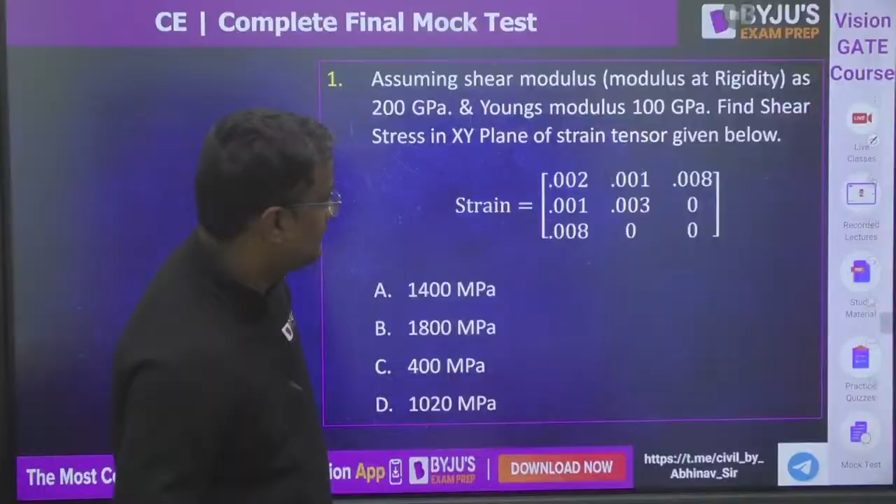So question number 1 to question number 50 I will be taking. Then question number 51 to question number 100 Richa ma'am will be taking. So I will be taking SOM, Maths, Soil, Survey, OCF, Building Materials and Highway Engineering, and the remaining subjects will be taken by Richa ma'am.

Ready guys, everyone? Please tell me. Everyone ready?

Okay, so this is the first question, guys. Please write the answers in the comment box. Come on, they are asking the shear stress value. What is the shear stress value? Tell me.

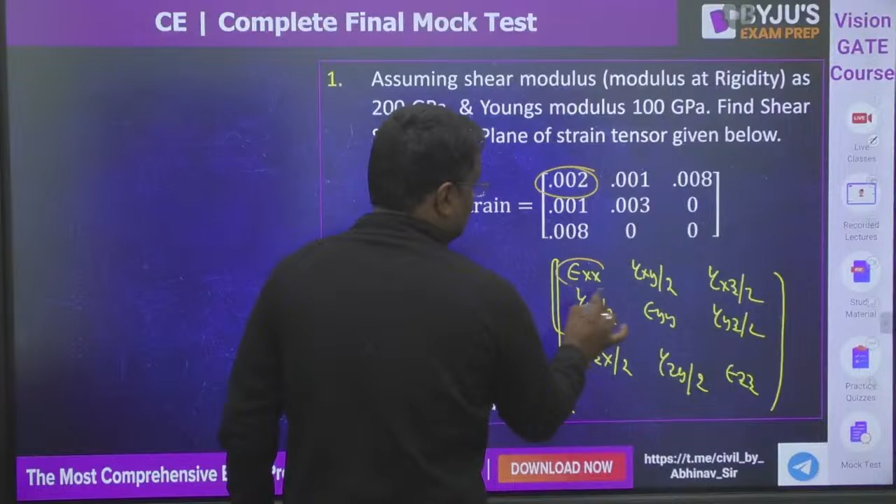Okay, see, guys, this strain is written, na? So strain matrix is epsilon xx, gamma xy by 2, and gamma xz by 2, like this. Gamma yx by 2, epsilon yy, gamma yz by 2, gamma zx by 2, gamma zy by 2, and epsilon zz. Okay, so now this is the value of epsilon xx. Similarly this is the value of epsilon yy. Similarly this is the value of epsilon zz. Similarly, guys, you can find all the values.

This is the value of gamma xy. Gamma xy and gamma yx both are same. So from here, gamma xy by 2 is equal to 0.001. So what is the value of gamma xy? 0.002. Now tau xy by gamma xy, shear stress by shear strain, is shear modulus. Shear modulus is 200 gigapascal. Answer is in megapascal. So tau xy by gamma xy, 0.002, is equal to G, shear modulus. Shear modulus is 200 into 10 ki power 3 megapascal, because giga is 10 ki power 9, mega is 10 ki power 6, so it will be 10 ki power 3. So tau xy is 400 megapascal.

Yes, Jagriti, good guys, everyone, great. Any doubt?

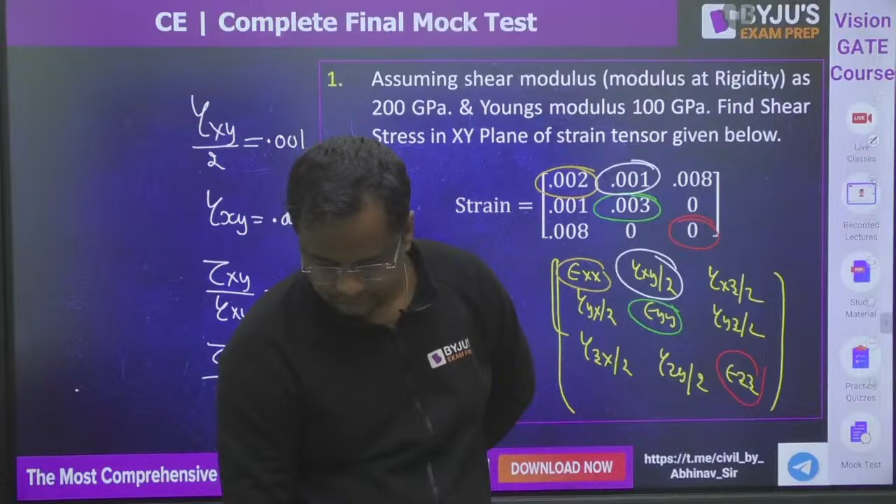Guys, this one, 95 megapascal is the stress. What is the maximum stress in the plate if there is a hole here? Okay guys, what is this force? If I want to convert this in force, force is stress into area. Area is 10 into thickness t. Okay, what is force? And for equilibrium it has to be same here. 95 is the stress into area. Area is 10 into t. Tell me. Any doubt?

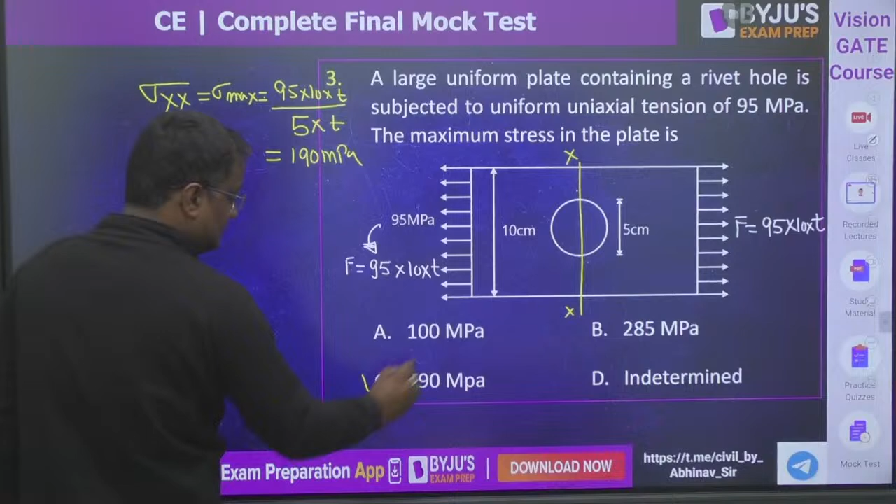No doubt. Now maximum stress will be here, normal stress, because here the area is minimum. So sigma xx will be the maximum, because there the area is minimum. It is force, 95 into 10 into t, upon area. Area there is only this and this, na? That is 5 into t. That is 190 megapascal. That is C option.

Okay, this one, everyone. Right now it is not in equilibrium. 35 and 49 is 14 here, 14 here and 21 here. Okay, so this should be 7. I guess now it is equilibrium. 56, yes. They are asking the value of stress in segment QR, here, xx. So sigma xx, either from right you see 21 going outward and 49 inside. That is total 28 compressive. 21 minus 49, 28. From here also guys, 7 minus 35, that is 28 only.

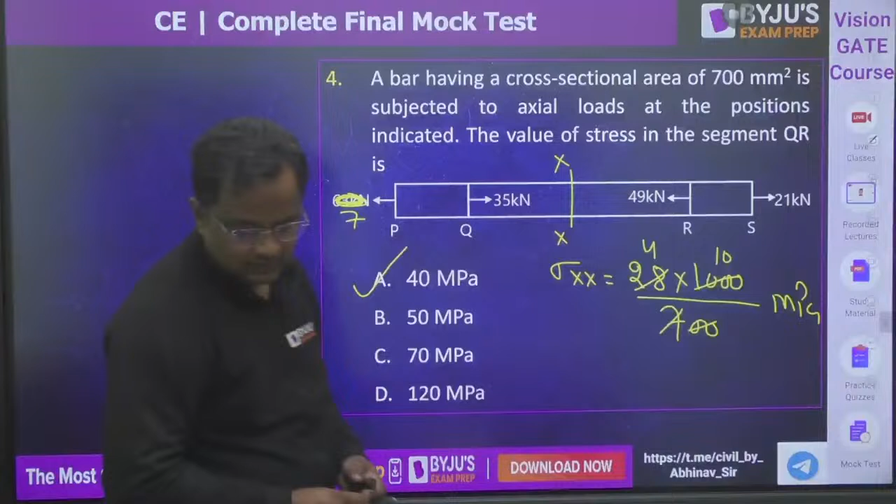28 kilonewton, that means this much Newton upon area 700 mm square. Newton per mm square is megapascal. So 7 fours are 28, 100 into 10 is 1000, so it is 40 megapascal. It is 40 megapascal. Shall we move further, guys?

Okay. Question number 6. The radius of Mohr circle gives the value of. This is tau. This is sigma. This is radius. So radius gives the maximum shear stress. But one more option can be correct. This question can be MSQ also, guys, if it is shear strain.

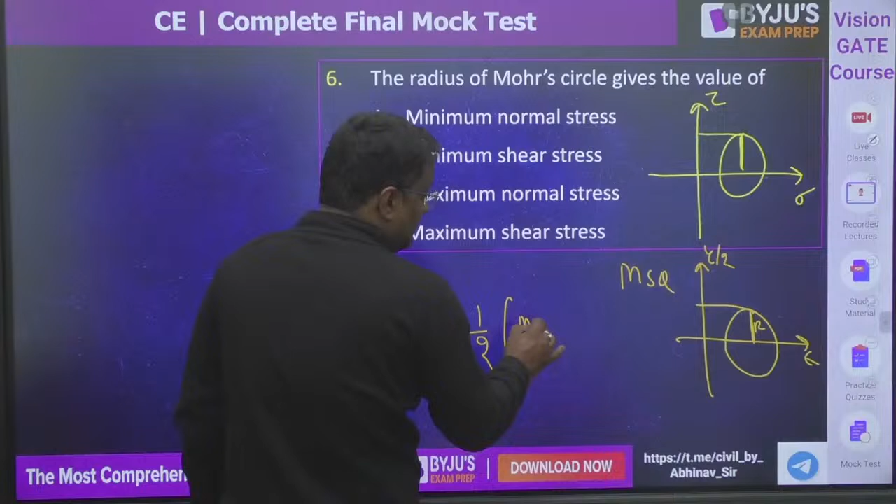If it is strain Mohr circle, then in that case radius is equal to gamma by 2 max, na? So half of maximum shear strain. So this is also correct, because radius is gamma by 2 max. So even this can also be correct, and it can be MSQ also, guys.

Okay. Question number 7. Tell me, element is given here, sigma x is this, sigma y is this, tau xy is this. Now the radius of Mohr circle, sigma 1 and sigma 2 is asked. Radius is given by root of sigma x minus sigma y by 2 whole square plus tau xy square. This is radius.

This radius: sigma x 110 minus 30 is equal to 80, by 2 is 40 square. 40 square plus 30 square, root, is equal to 50. Radius is 50, so only one option is there. Otherwise, you can apply the formula of principal stress also.

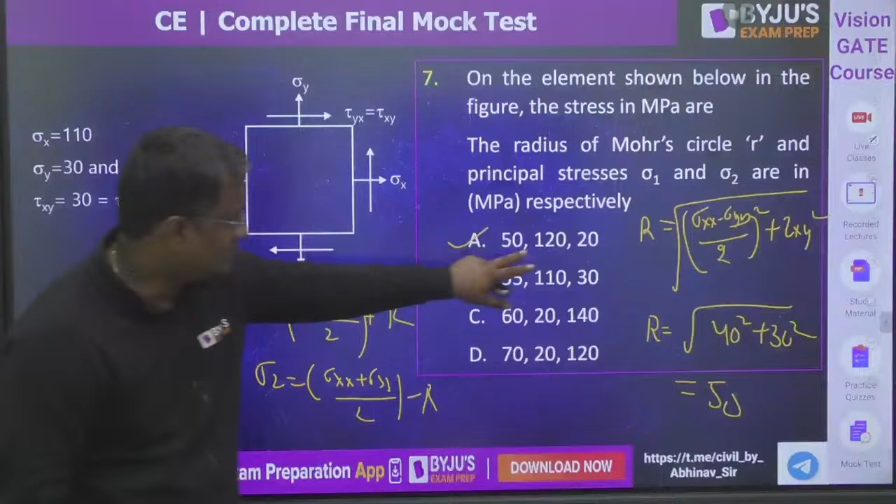Sigma 1 is sigma xx plus sigma yy by 2 plus radius, and sigma 2 is sigma xx plus sigma yy by 2 minus radius. What is sigma xx plus sigma yy? 110 plus 30 is 140, by 2, 70. 70 plus radius is 120. Okay. And 70 minus radius, 70 minus 50 is 20. So A will be correct. Got it?

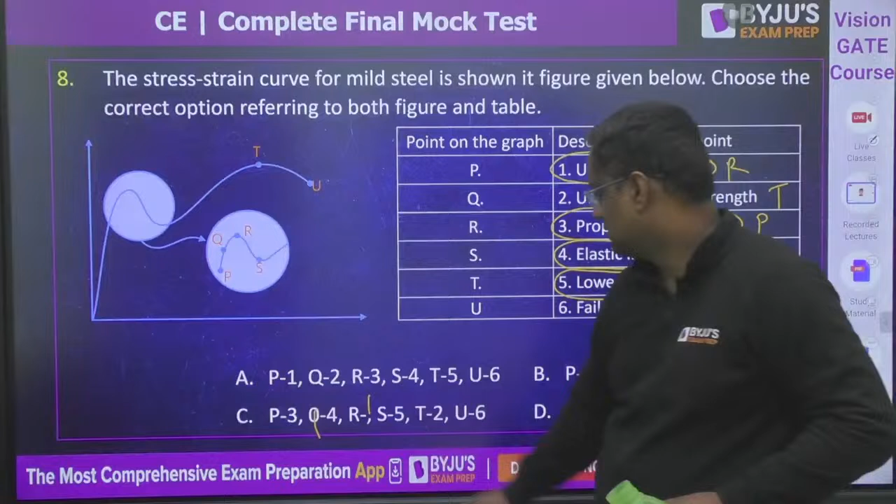In the cantilever PQR as shown in the figure, the segment PQ has flexural rigidity EI. QR has infinite flexural rigidity. What does infinite flexural rigidity mean? That is purely rigid. Young's modulus is infinite. For infinite Young's modulus, for any value of stress, strain is not coming.

Okay, so guys, this will not bend like this. It is rigid, so it cannot bend like this. So the deflection shape of this is like this, and this will not bend, that is rigid. Now guys, if I am transferring that W here, that is P, that is Q, that is L, that is EI. So here it will be W load, and a moment WL will be there.

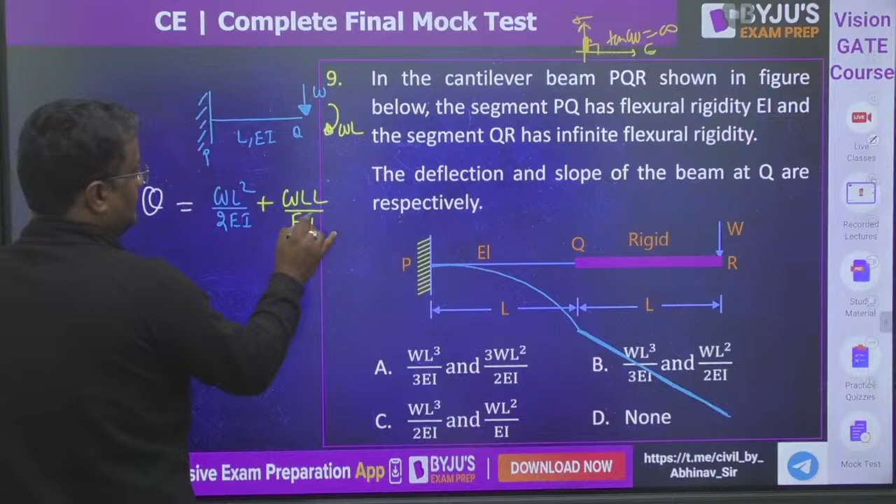Now if you write theta and delta, theta due to W is WL square by 2EI. Due to M, what is theta? ML by EI. So M is WL into L by EI, WL square by EI. So what value is coming? 1 by 2 plus 1 is equal to 3 by 2 WL square by EI. Correct?

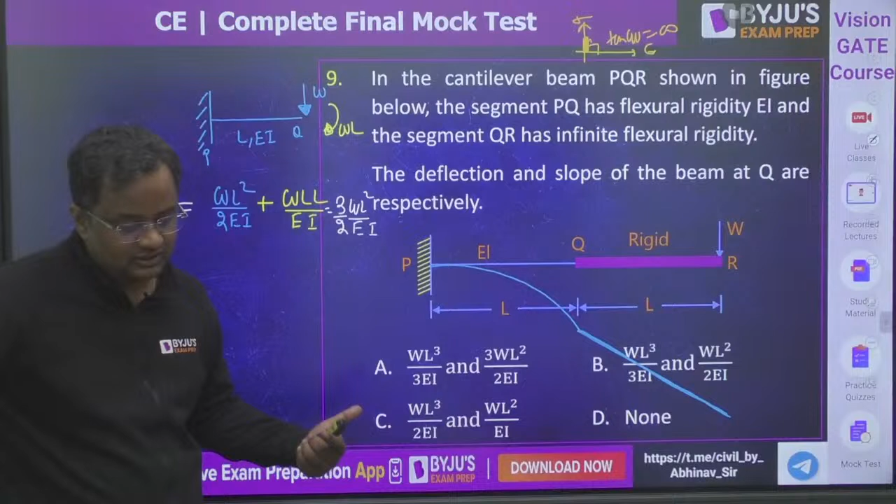Correct? What you are saying? A, C. For which question? Write the question number also. Guys, units are not matching here. Acha, first is deflection. Okay, sorry.

First is deflection. Now, if I want to find deflection of Q, then deflection due to W is WL cube by 3EI plus deflection due to this moment is ML square by 2EI. So WL into L square by 2EI. Now total value is 1 by 3 plus 1 by 2, which is 5 by 6. 5 by 6 WL cube by EI. Ninth, A? No, A is not coming. None is coming. 5 by 6 is coming, guys. Please check.

Deflection and slope of Q. So deflection is WL cube by 3EI and ML square by 2EI. So 1 by 3 plus 1 by 2, and none is coming here. If somebody asks you deflection at R, then

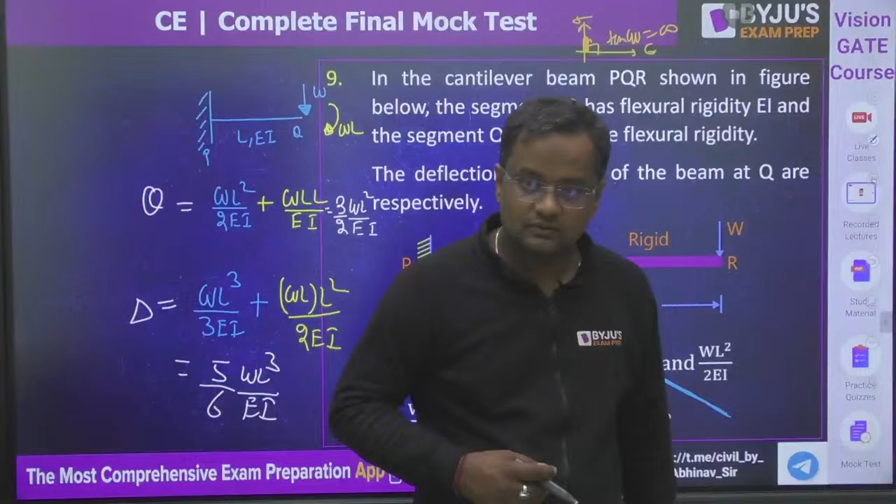Okay, so what is deflection at R? Tell me. If you want to find out deflection of R, then whatever is the deflection of Q you have found out here, plus, guys, this is theta, so this value is theta into L. So deflection of R is equal to deflection of Q plus theta into L, and this is the value of theta. Give me yes or no, everyone.

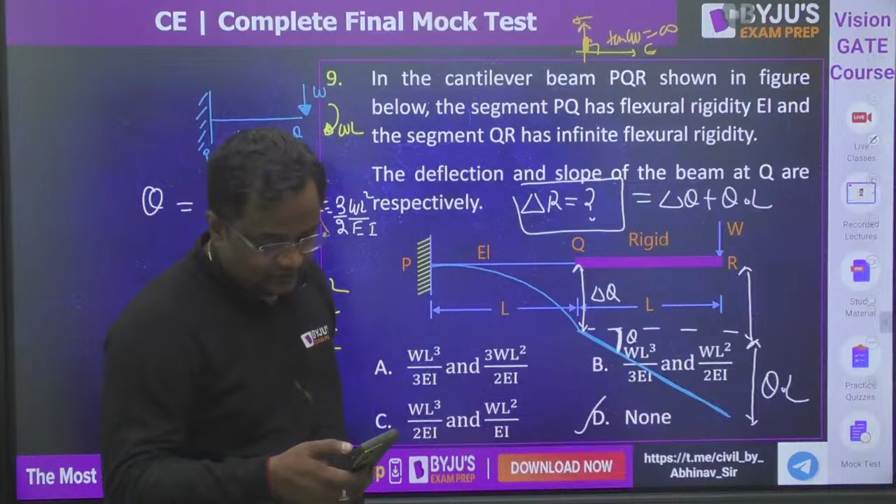A bar is compressed to half of its length.

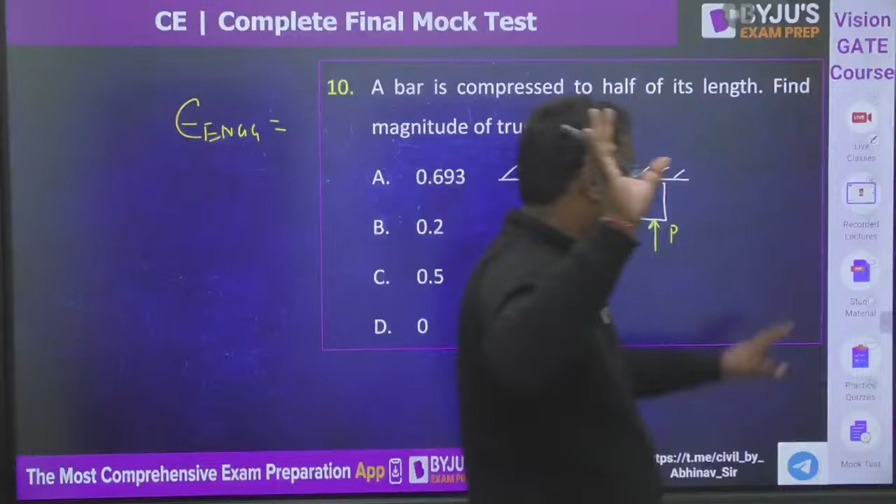In this bar I applied a force P. After application of force P, the length is reduced to half, so it is 0.5L. Now what is asked? True strain. First let's see engineering strain. By default, if nothing is mentioned, we take it as engineering strain. So delta by L. Change in length is 0.5L, original length is L, so this value is 0.5, and since this is compression, it is minus 0.5. So epsilon engineering is equal to minus 0.5.

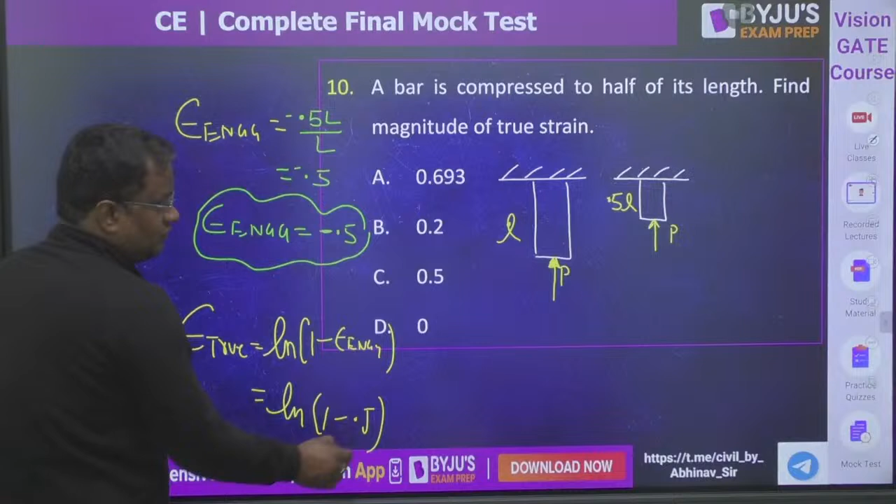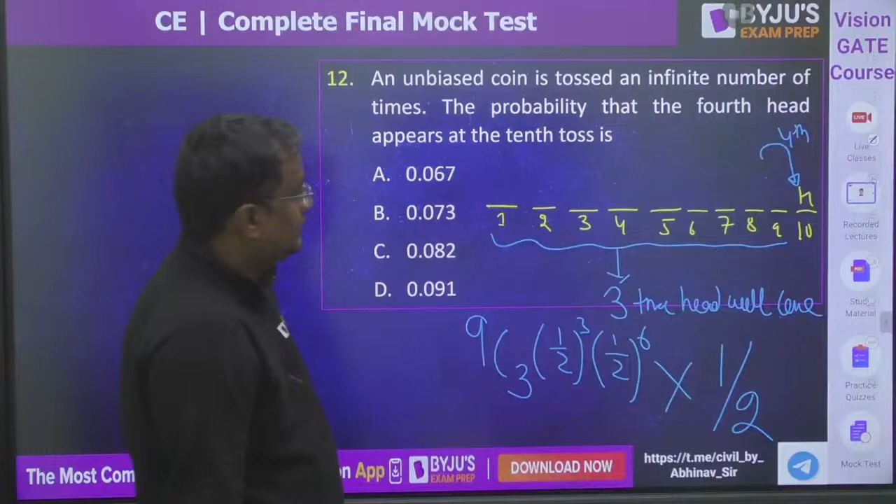So this is the probability that in 9 trials head comes 3 times. Don't stop here - then in the 10th trial, head should come, which is 1/2. Give me yes or no, everyone. Did everyone get it?

Now, a fair 6-sided dice is rolled twice. The probability that the sum is 9. So let's list: 1,1 / 1,2 / 1,3 up to 1,6. Then 2,1 / 2,2 / 2,3 and so on up to 2,6. Then 3,1 / 3,2 / 3,3 / 3,4 / 3,5 / 3,6. Then 4,1 / 4,2 / 4,3 / 4,4 / 4,5 / 4,6. Then 5,1 / 5,2 / 5,3 / 5,4 / 5,5 / 5,6. Then 6,1 / 6,2 / 6,3 / 6,4 / 6,5 / 6,6.

Now how many total outcomes? 36 total outcomes when 2 dice are rolled. For sum equal to 9: this can happen as 3-6, 4-5, 5-4, or 6-3. Sum always comes in a diagonal pattern, like for sum 7: 6-1, 2-5, 3-4, 4-3. So counting the cases for 9: 1, 2, 3, 4 - that's 4 favorable cases out of total 36 cases. So the probability is 1/9.

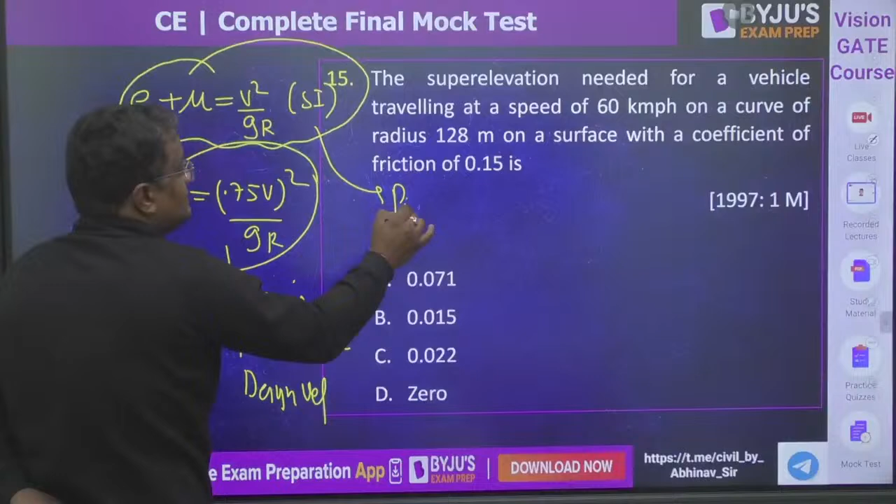Now there are so many vehicles on the road, then this formula is used, which comes from derivation. When for a particular case they are asking about a particular vehicle, that vehicle's speed, with which speed, for that particular vehicle which super elevation is needed, then you have to use this other formula. Now the super elevation needed for a particular vehicle is asked, so we will be using this formula.

E plus mu is equal to V square by 60 into 5 by 18, upon 9.81 into R is 128. This is 0.15. Please check, it will be coming as option A.

Tell me. Good morning Anwar, a little late today.

Question 16: if an ascending gradient of 1 in 50 meets another ascending gradient, both are ascending gradients. So this is also increasing, 1 in 30.

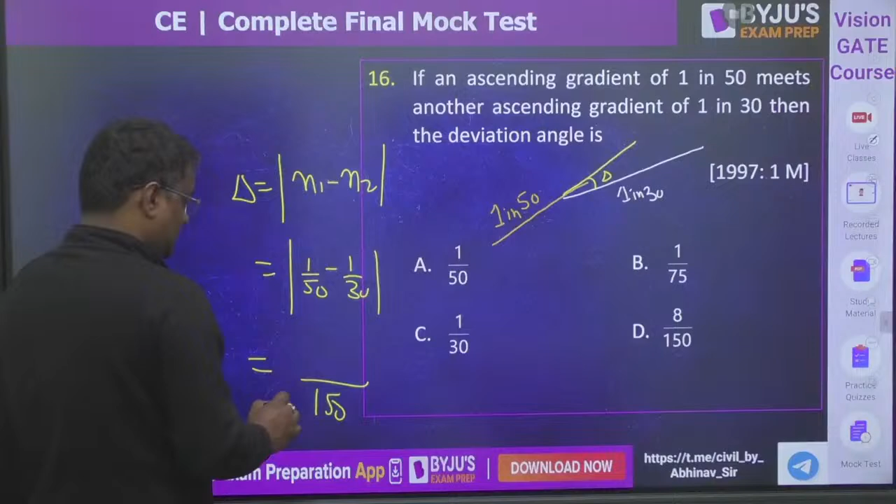Then what is the deflection angle? What is this delta value? So delta value is n1 minus n2. The deflection angle, n1 is 1 by 50 minus 1 by 30. So LCM is 150, 1 by 50 value is 3 minus 5, giving 2 by 150 which is 1 by 75.

1 by 75. Yash is also saying 16, yes good Yash. Please, whenever you are writing A, B, C, D, mention the question number also.

Okay, this one is an excellent question. See, first statement I am checking: magnitude of G2 is more. First statement: plus G1 is followed by plus G2. G1 plus means increasing, and G2 is having higher magnitude. So G2 is like this, plus G1 and plus G2, so this will be a valley curve. Statement 1 is correct.

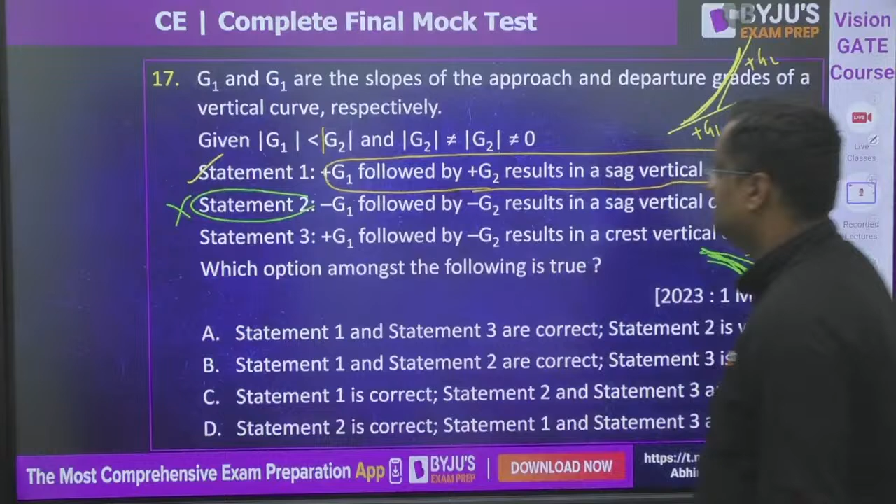Now statement 2: minus G1 followed by minus G2. So decreasing, minus G1, but G2 is having higher magnitude. So this also will be... it is a summit curve, not a sag curve, since convex is upward. Now this one: plus G1 is followed by minus G2. G1 is plus, G2 is minus, so this will be a summit curve. Crest means summit curve, so this is correct.

Statement 1 and 3 are correct and statement 2 is wrong. Have you understood this? Please tell me, friends.

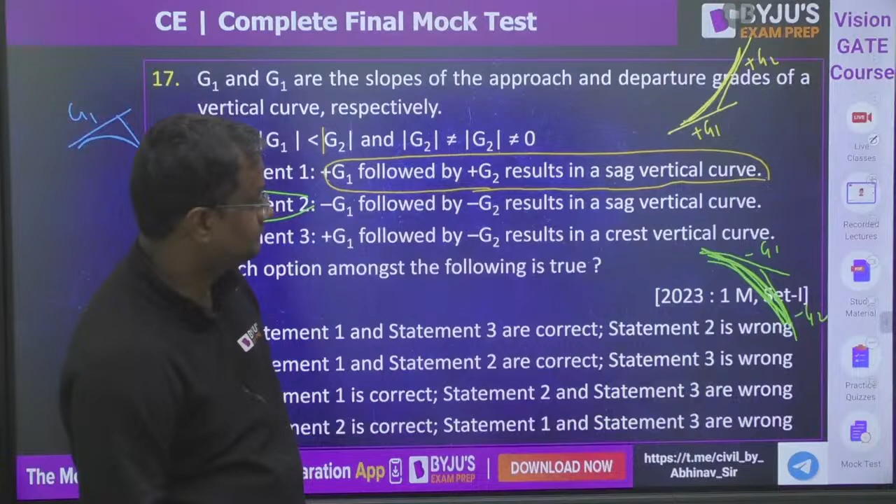Okay now guys, see this is arrival at a section and departure. This is arrival at a section, and this is departure. What is the delay?

Average delay, very simple guys, two methods I am telling you. First, if a person comes to my home at t is equal to 8 p.m. and goes at t is equal to 9 p.m., that's 1 hour delay in my home. If a vehicle is coming at t is equal to 0 seconds and going at t is equal to 10 seconds, then 10-second delay. If a vehicle is coming at t is equal to 1 second and going at t is equal to 4 seconds, so 3-second delay.

So delay is departure minus arrival. This is departure, this is arrival, so minus is this. This is departure, this is arrival, minus is this. So this is departure minus arrival throughout.

Okay, so total delay is the area of this. What is area of this? Half base into height, 40, so it is 600 seconds. Half base 30 into height. So what is average delay? 600 is total delay upon 40, is equal to 15 seconds.

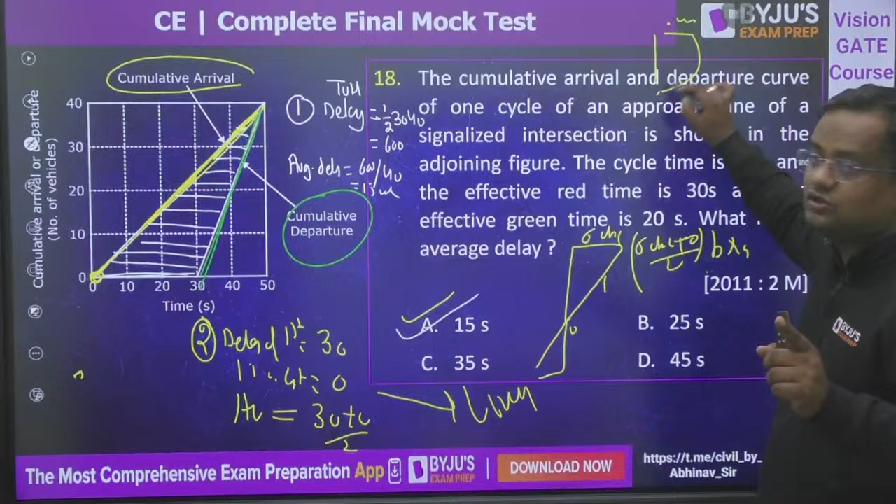For the limit state method, guys, you don't write 0.45 FCK plus 0 by 2 into B into XU limiting. There you write the area of the stress diagram into width. So this kind of thing, first plus last by 2, is only applicable when there is a linear relationship.

Mayank, kaise ho Mayank bhai? Open jeep kaisi hai? Have you got that this second method is only applicable when there is a linear relationship? Got it?

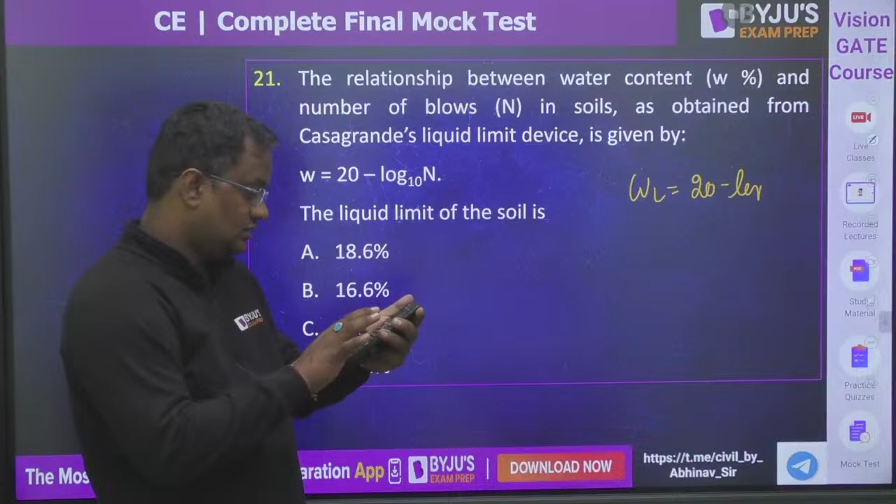For 25 number of blows. When 25 blows close the groove, so you will be getting 18.6%.

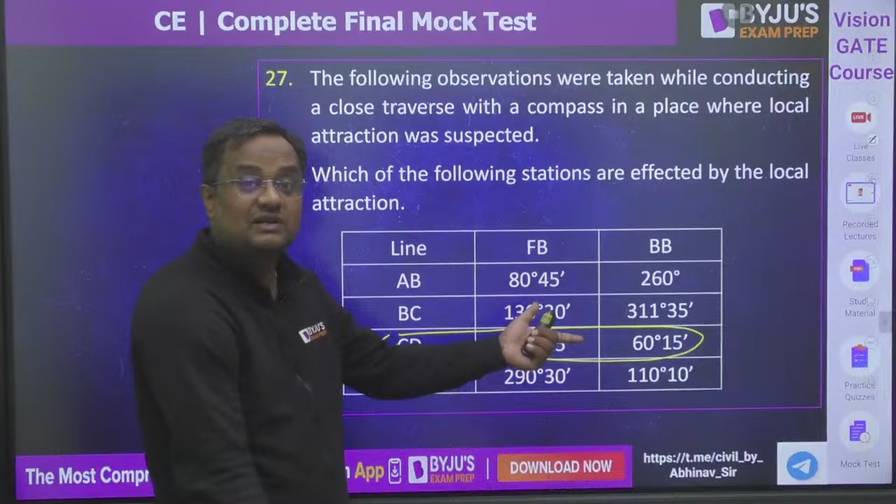Guys, see, the difference of C and D is 180 degrees. Although I have told you many times that even if the difference is 180 degrees, it doesn't mean local attraction is 0. The local attraction at both stations might be same in magnitude and same in direction. If the local attraction at C and D is there, and it is same in magnitude and same in direction, then also the difference will come out as 180 degrees. But in surveying, we assume that if the difference comes to 180 degrees, there is no local attraction. Even if there is different local attraction, the difference can still come to 180 degrees due to precise observation error.

So this is assumed to be free from local attraction. So what are the stations which will be affected? A and B.

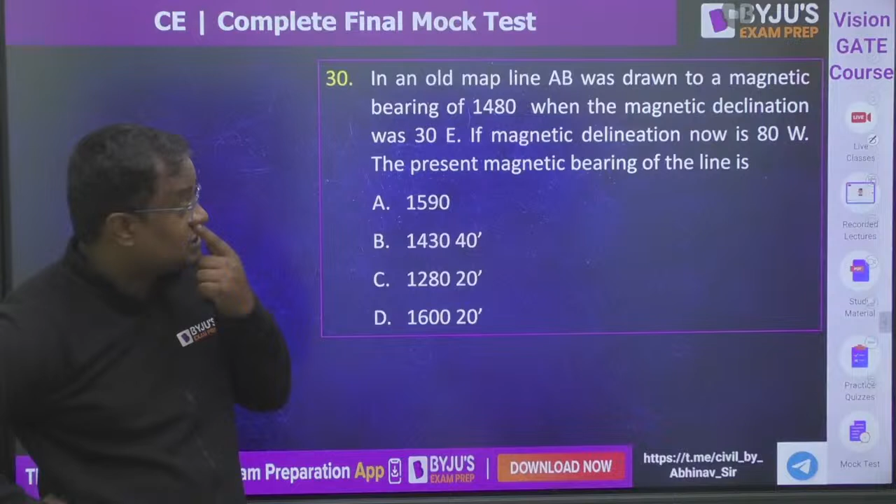Guys, a magnetic bearing is 1480 when declination was 30 degree east. Sir, how is this possible? So much big magnetic bearing. If today's declination is 80 degree west, what is the magnetic bearing right now? How, sir? Guys, suppose this is 90 degree bearing. So same can be written as 90 and then 360 more, so 450 also. Then same can be written as 450 plus 360 also, and 450 plus 360 plus 180 also.

Okay. So guys, when the declination was 30 degree east from true meridian, it was earlier 30 degree east. Now it is 80 degree west. So 30 and 80. So earlier you are measuring any line from here, but now you are measuring 110 degree more because this has shifted to here. So 110 degree more value will be coming. 1480 plus 110 gives 1590. Understood?

Understood, friends? Please tell me. Everyone? Any doubt to anyone?

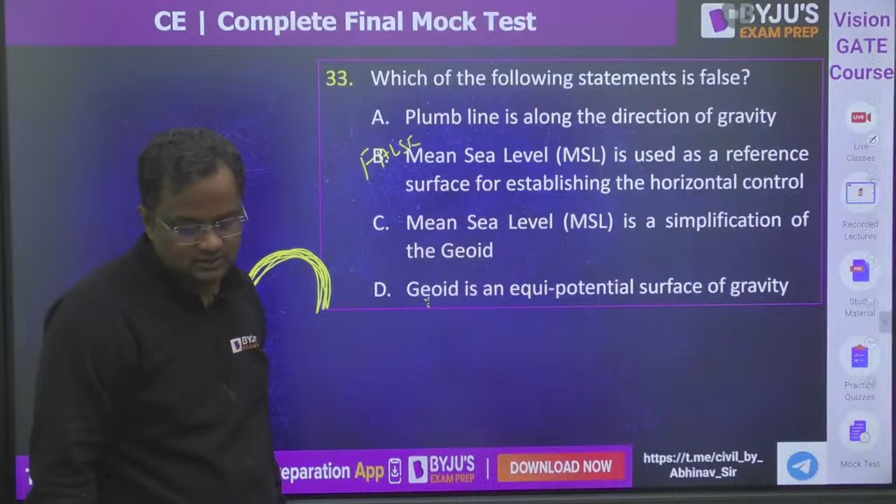33, you are saying C. Tell me the false one. Plumb line is in direction of gravity, correct. Mean sea level can be used as this is false. Guys, mean sea level is in the shape of earth because it is over earth. So yes, it can be a simplification of geoid. Geoid will be like a mean sea level because sea is above earth, so shape will be same, and all points on geoid have equal gravity. But mean sea level is not horizontal. So how can I take it as a reference for horizontal points? So B will be the answer. Jagrati, good.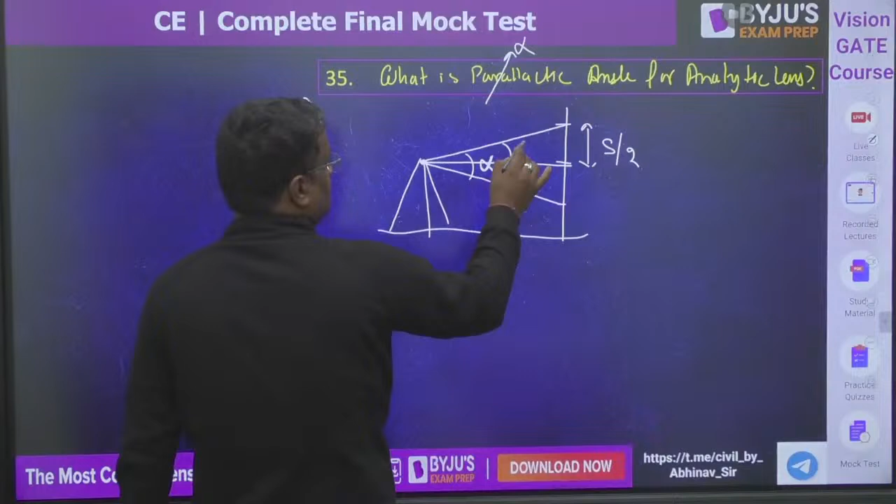Parallactic angle is this total alpha, so this is alpha by 2. This is D. So tan alpha by 2 in this triangle is perpendicular S by 2 upon base D. D is Ks plus C. For anallactic lens K is 100 and C is 0. So tan alpha by 2 is 1 by 200. So alpha is, you can check, 0 degree 34 minutes and 22.63 seconds.

Are you getting the same value? Yes or no? Okay.

What is stopping sight distance? It is the braking distance plus the distance traveled during the perception reaction time. Okay, lag distance plus braking distance. Tell me this please.

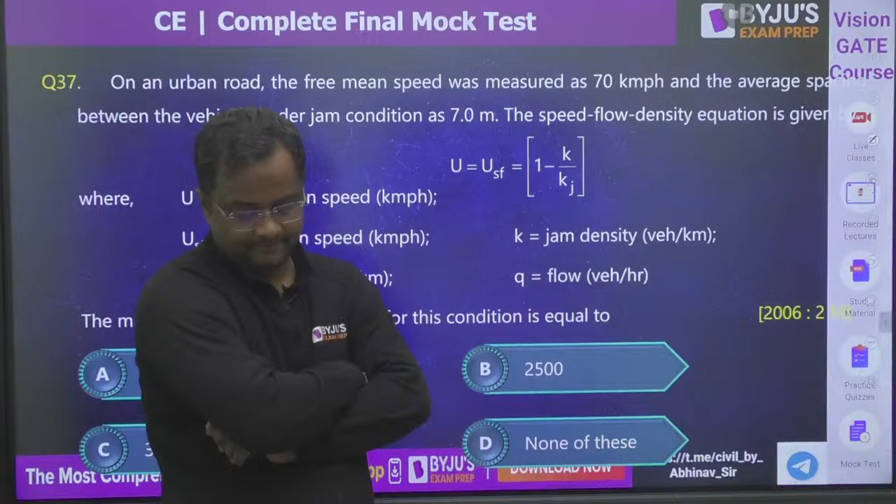Guys, this is a linear relationship between V and K. So Q max is equal to Vf into Kj by 4, because the relation between them is linear. Now guys, in jam condition the spacing is 7, so Kj is 1000 by 7. What is Vf? The free mean speed is given as 70. So from here you can get the value.

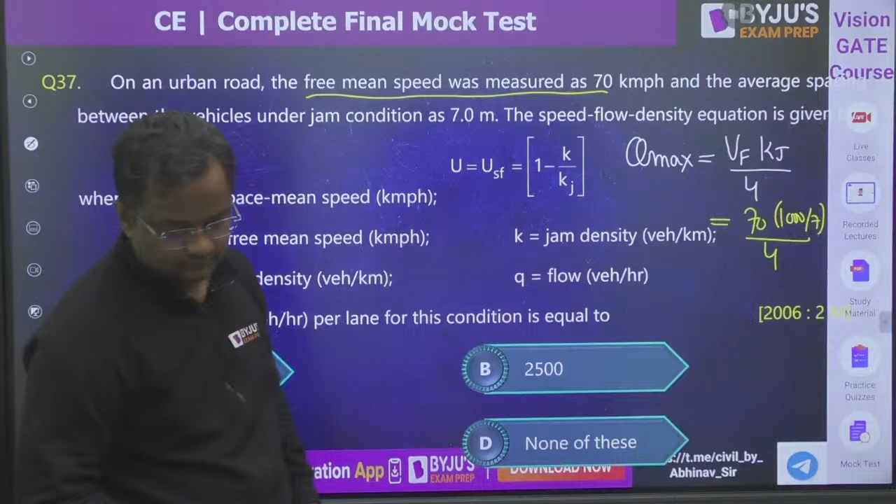Got it? Everyone? Please tell me. Please tell me.

Okay. Now guys, which of these phases are not possible? See P, what is happening? 1 and 4 can go in one go. There's no collision. 2 and 5: 2 is going like this, 5 is going like this. It's absolutely fine. 3 and 6: 3 is going here, and 6 is going here, that's fine.

Now Q: 1 and 2 both can go together. Then 4 and 5, yes, can go together. 3 and 6, yes, can go together. 2 and 5 can go; 2 will go here, 5 can go here. 1 and 3 will be a huge collision, guys. So this is not possible. R is not possible, guys. Everyone tell me, have you understood?

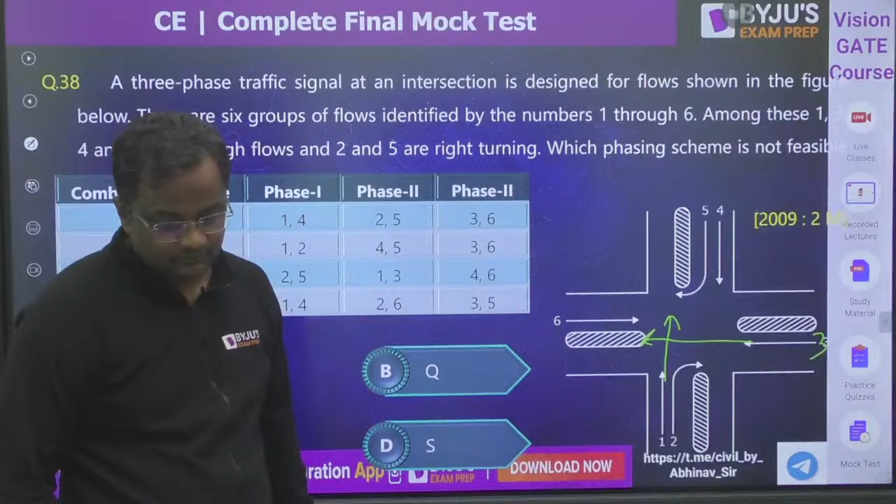Okay. Now guys, when subjected to bending moment M, the total strain energy is the integration of M square dx upon 2EI for the whole structure, for the whole beam or frame or whatever. It is the total. Got it?

Okay, what is the size of modular brick? The size of modular brick is 19 centimeter into 9 centimeter into 9 centimeter. King closers are related to, king closer is related to,

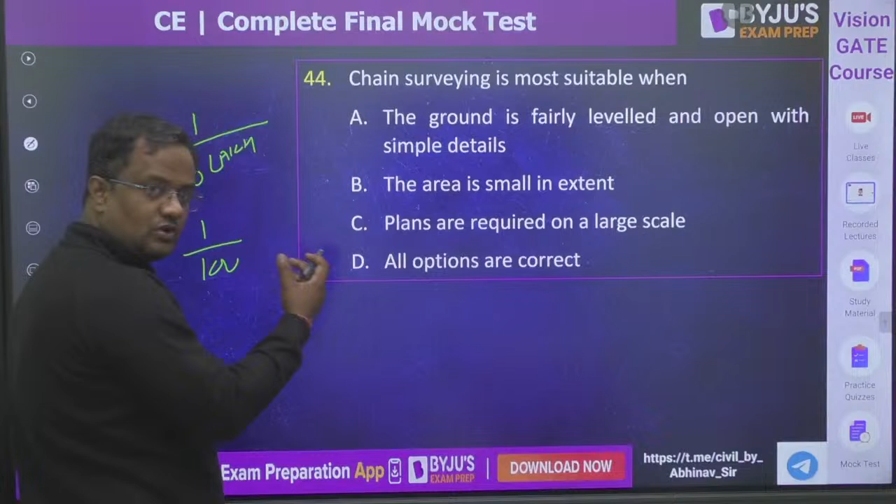Plans are required on a large scale. Yes, large scale means small area. Guys, for an India map, you have to make the scale like 1/10 lakh. But for this room, you can make a large scale, 1/100, and the room will fit on paper. So large scale means small area, and in a small area chain surveying can be done. So all options are correct. Any doubt?

Okay. What is the total number of links in a Gunter chain? In a Gunter chain, the total number of links is 100.

Okay. For a pipe half full, what is hydraulic depth? Guys, they are asking hydraulic depth, not hydraulic radius. What is hydraulic depth? A by T. Hydraulic mean depth is hydraulic radius. But here they are asking only hydraulic depth, that is A by T. Tell me the value. A is how much?

Pi r square by 2, and top width is 2r. Area is pi r square by 2, so it is pi r by 4. Any doubt to anyone? Any doubt to any champion?

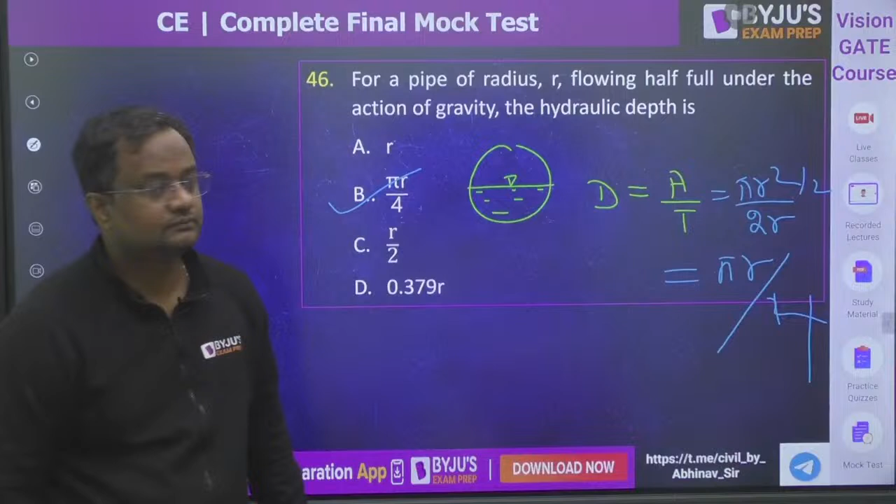Okay. What is Zubair writing? "No sir, hydraulic mean depth is also A by T." Hydraulic mean depth, Zubair Hussain, is hydraulic radius. Okay, you can check it.

Okay, what is YC for the discharge? YC is q square by g to the power 1/3. For a rectangular channel 1 meter wide, small q is capital Q by B. So q square by 9.81 to the power 1/3. This is YC. Now calculate YN. YN is given as 20 centimeter.

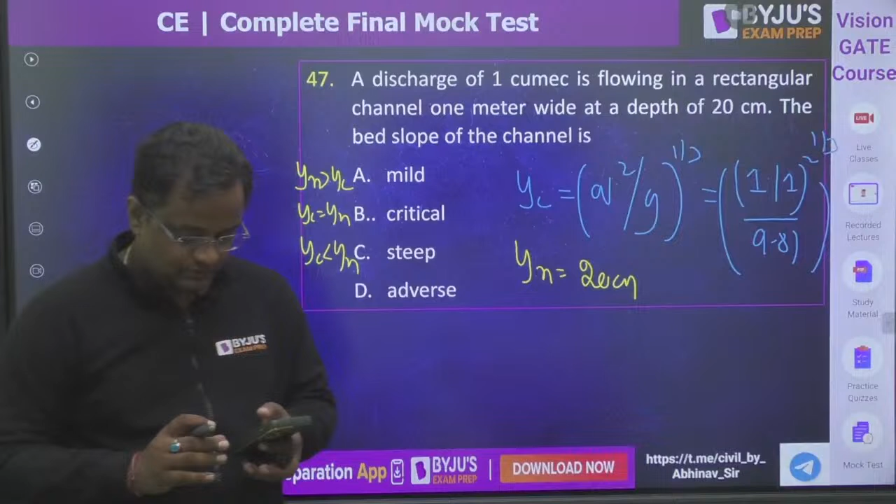Now if YN is greater than YC, it is mild slope. If YC and YN both are the same, it is critical slope. And if YN is less than YC, it is steep slope. So you can check the values. Okay? Any doubt? Zubair, you can send me the screenshot if any.

Okay, 48. Take it as homework, guys.

Which of the following represents a line joining the points of equal dip? Guys, see, equal elevation is contour. Equal rainfall is isohyet. Equal velocity is isovels. Equal evapotranspiration is isopleth. Equal time to reach the channel outlet is isochrone. Equal magnetic declination is isogonic line. Equal declination, but where that equal is zero declination, is agonic line. Okay. Equal pressure is isobars.

No need to write down. You can go to YouTube, you can rewind and write down again.

Okay. Equal dip: dip is the angle between the needle and the horizontal. At the equator the dip is 0, at the poles the dip is 90. So equal dip is isoclinic. Equal dip is isoclinic.

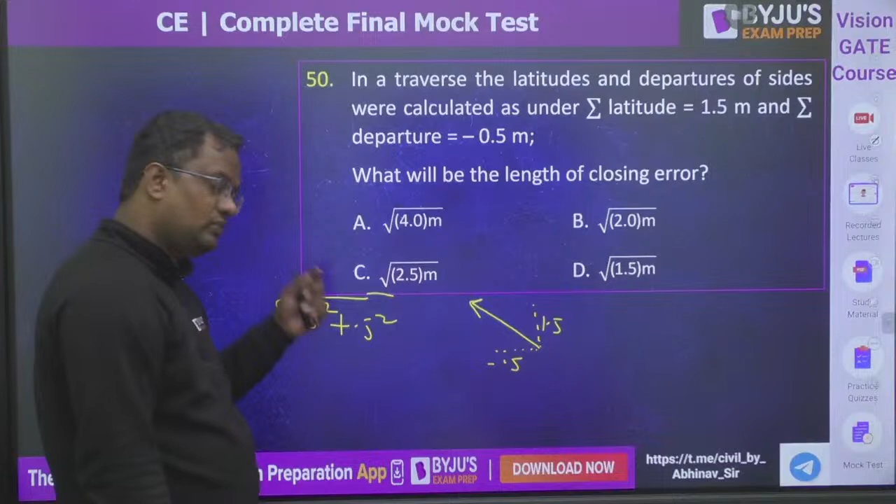Latitude and departure are calculated. What are they finding? What will be the length? So, see, latitude is 1.5, this value, and departure is minus 0.5. So length is the square root of 1.5 square plus 0.5 square. Okay. So what is this value coming? 2.25 plus 0.25. No need of a calculator also.

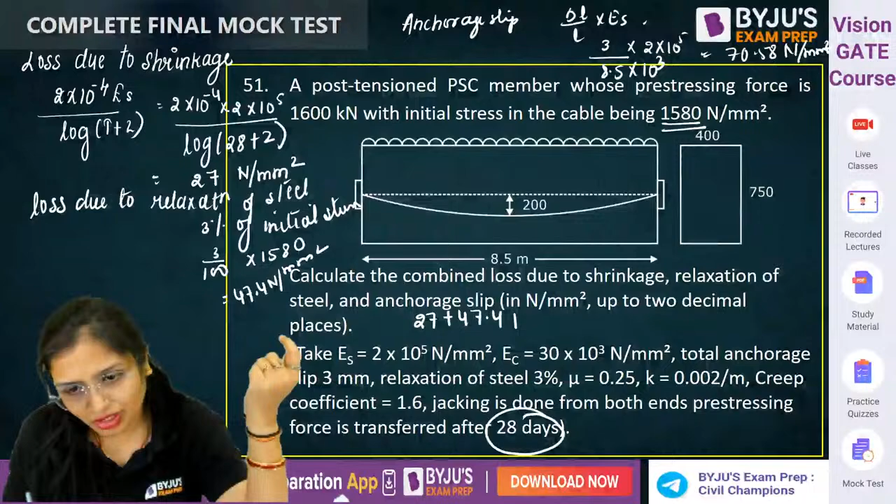How much is it coming? Come on, waiting for your answers. Tell the total answer. 70.58 Newton per mm square. It is asking the summation of all these three. So the summation will be how much? 27 plus 47.4 plus 70.58. What is the answer? 144.98. Good. Jagriti, keep up this speed. Okay. Answer. Cool. So you will get such sort of questions.

Or of beams also, remember, if you see the GATE, BARC 23 papers and all, they have given questions of beams also like this. So remember. Now this is again a question of pre-stress. A pre-stressed rectangular beam is there whose size is 300 mm by 900 mm. Okay. And pre-stressing force is 700 kilonewton.

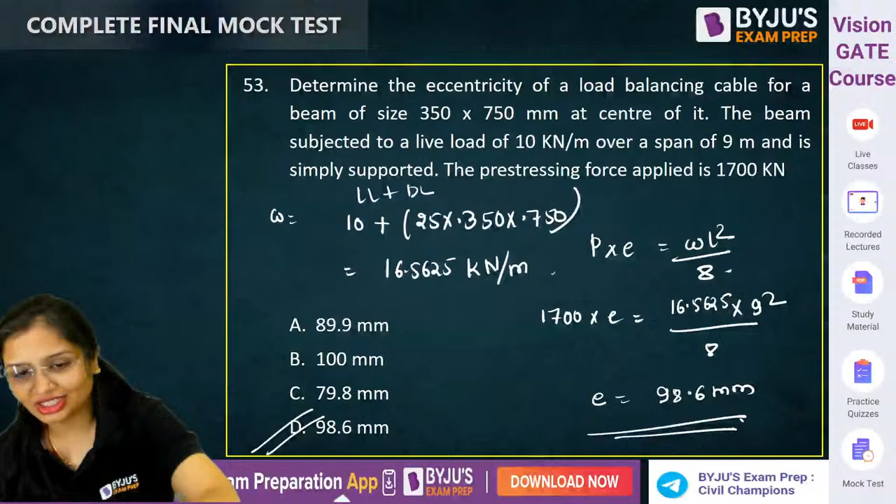Good. 54th question. Here अभी irrigation का question आ गया. Here you have been given a weir floor. Okay, 3 sheet pile walls is given to you. You have to calculate the ratio of creep length from Lane's theory to that from the Bligh's theory. Ab those who know the concept, they will be only able to answer this. Bligh ne bola whether it is horizontal creep or whether it is vertical creep, the weightage will be 1 only.

So pehle pani will go like this. So 2 times 10. Then it will go like this plus 8. Then it will go like this. 2 times 8. 8 ऐसे गया, फिर 8 ऐसे गया. So that's why 2 times 8. Then 12 plus 2 times 12. Solve it and tell me how much it is coming for Bligh. You can take 2 common and add 10 plus 8 plus 12. कितना आ रहा है? Solve it. 80 it will come.

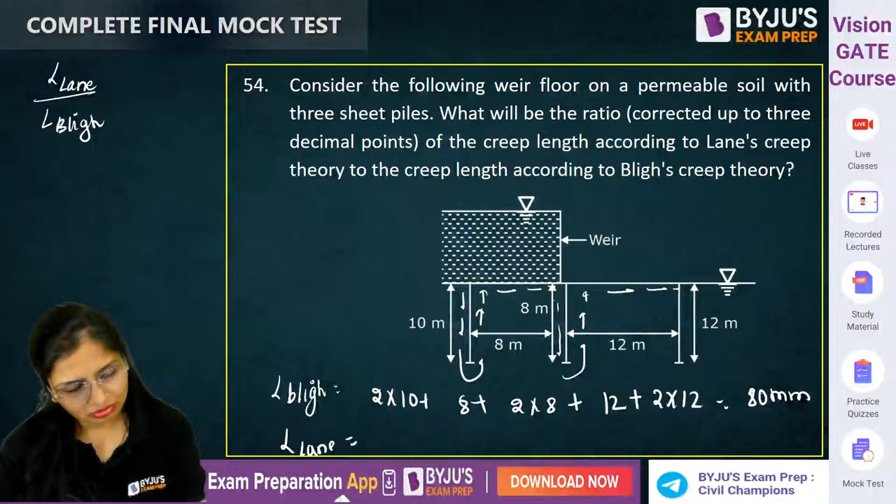Lane has given weightage. Weightage कितना दिया उसने? Horizontal it has given some weightage and vertical it has given some weightage. Can you tell me what is the weightage factor? Horizontal को वैसे ही रखा कि vertical को वैसे ही रखा? Vertical को वैसे ही रखा, kept vertical as it is but given a weightage of 1/3 to the horizontal one. So vertical was 2 into 10 plus 8 plus 12. इसको वैसे ही रखा और जो horizontal है 8 मीटर, इसको weightage दिया 1/3. The horizontal it has given the weightage of 1/3.

Very good Abhay, very good, too good. ये कितना आएगा? 66.6667. So the ratio, how much it is coming? 0.833. Correct. Remember, Lane has given a weightage of 1/3 to the horizontal creep and given a weightage factor of 1 for vertical creep. वही logic लगाया बस. पानी ऐसे, according to them this will flow like this. So I have done that only.

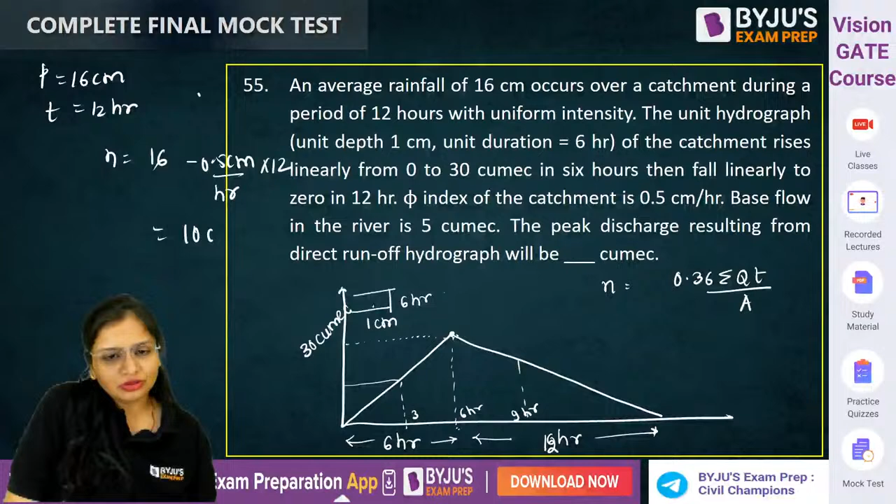0.5 से एन तो मैं अभी निकाल लूंगी, 16 सेंटीमीटर बारिश हुई, 0.5 सेंटीमीटर पर आवर इज द इनफिल्ट्रेशन फॉर 12 आवर्स, यहां से तो ये 10 सेंटीमीटर एन आ गया। अब एन निकाल लिया, तो अब बोलो 30 इंटू 10 कर दूंगी।

कोई बताएगा कैसे सॉल्व करना है, क्विक, कम ऑन, यह प्रीवियस ईयर क्वेश्चन है तो बताओ जल्दी, कोई नहीं बता पा रहा है। 16 सेंटीमीटर बारिश हो रही है, पीरियड ऑफ 12 आवर्स, यूनिफॉर्म इंटेंसिटी इज गिवन टू यू।

अब एक चीज आप देख सको भाई, ये जो हाइड्रोग्राफ है this is for 1 centimeter 6 hours and it is asking for 12 hours। अब ये भी तो देखो, it is asking for 12 hours, so first you need to calculate the ordinates। आपको similar triangles, very good Zubair said it, आपको पहले यहाँ पे similar triangles से 3 hours 6 hours 9 hours, every hour you need to calculate the ordinates, क्योंकि here I'll solve it, हाँ या तो lag करके कर लो or you can use the method of S curve।

So first you will calculate the ordinates, calculate कर लो ordinates, come on, थर्ड आवर, 9th आवर्स, एवरी आवर कैलकुलेट द ऑर्डिनेट्स। अब यहाँ पे अगर 30 है, यहाँ पर आप सिमिलर ट्राइंगल्स लगाओ, यू विल गेट 15, हियर यू विल गेट 22.5, हियर यू विल गेट 15, फिर यहाँ पे मिलेगा 7.5। ओके, so every hours you can calculate using similar triangles, now I am doing it by S curve, आप you can do by any other method also, मतलब method of superposition also you can apply, that's up to you। ठीक है, अब मैं टाइम यहाँ पे ले रही हूँ 0 3 6 9 12 15।

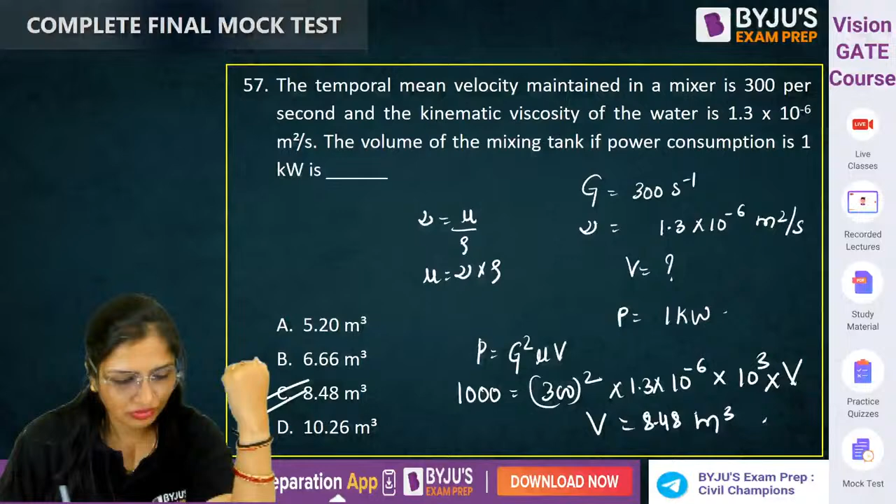RCC structures, remember that these questions come again and again. A short column is there whose cross section is 460 into 600 mm. Column is meeting general requirements. 10 bars of 20 mm dia are provided as main bars. It is asking you the ultimate load carrying capacity of the column, which means PU.

Come on. 0.4025. You only have to calculate AC and ASC, area of steel in compression. Quickly solve it, you will get the answer. Come on, quick, and tell me also what is AC and what is ASC.

Anwar, solve this, then I'll go back to the question and tell you. Solve it first for one minute. Gross area: 460 into 600. Area of steel in compression: 10 bars of 20 mm dia. Okay, so AC will be AG minus ASC. Solve it and tell me the answer first.

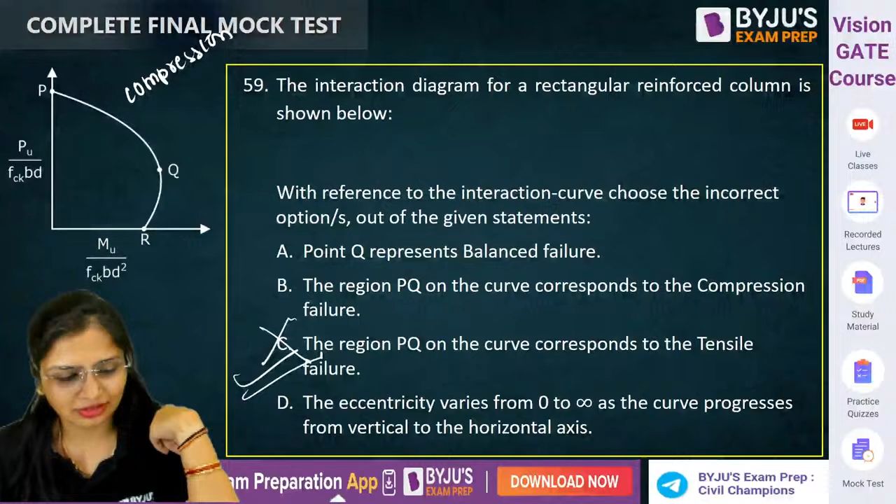Question number 60: the effective span of a cantilever slab at the end of a continuous slab. This is W, this is L0. Here you will make a mistake, I know it. Come on, solve it.

D, very good. L0 plus W by 2. If instead of this it were just a cantilever slab like this, L0 and D, then how much would it have been? L0 plus D by 2. But since it has asked continuous slab, it is length up to the face of support plus half of the effective width.

Correct, this one is environment. Now answer this question, read it properly and answer it. Consider the following statements with respect to aerobic and anaerobic sewage treatment process. Come on guys.

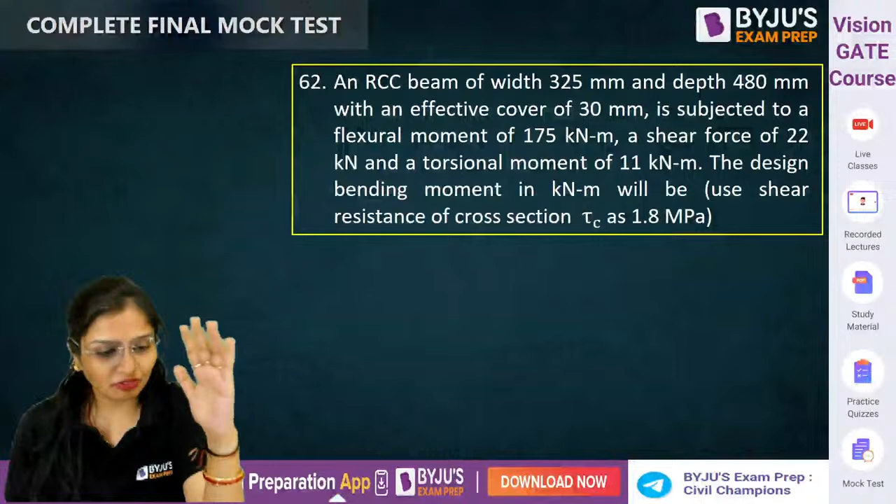RCC beam is there, okay. Width is given to you, depth is given to you, effective cover is given to you, bending moment, shear force, torsional moment is given to you. It is asking you the design bending moment. Good question this one, I'll give you the options also, but first solve it. I'll give you the options also. Solve it.

Come on. First I have to check it out - whether tau v, the shear force which is coming, is less than the critical one or whether it is more. So let's first calculate tau v.

For tau v, first we need to calculate VUE, the equivalent shear force. Since torsion is also shown here, this will come as VU plus 1.6 TU by B. Calculate it - the equivalent shear force comes out.

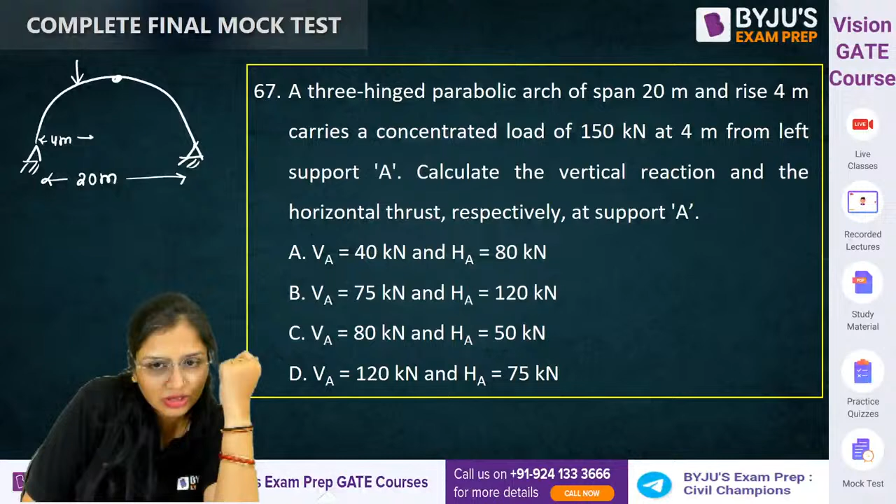Correct. Now this one - yes, a big question and a good one. A 3-hinged parabolic arch is given to you. Span is 20 meters, carrying a concentrated load 4 meters from the left, and the load is 150 kilonewton. You have to calculate the vertical reaction at A.

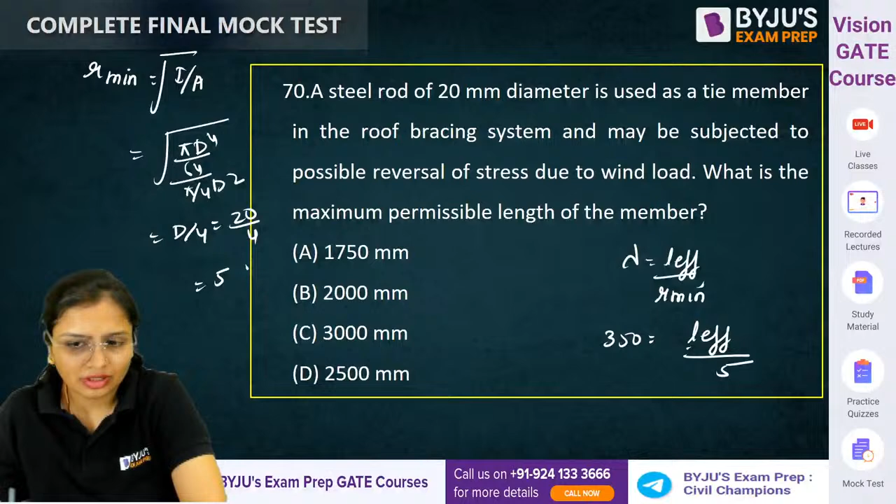Now what is this steel rod? It's circular. Calculate L effective. Just remember R minimum is D/4, it will save time. How much is it coming? Possible reversal of stresses due to wind load, for that lambda is 350. Solve and tell me how much it is coming. 1750.

Correct. Question number 71. What is the section modulus required to design an angle purlin which experiences a maximum bending moment of 10 kilonewton meter and is made of Fe250 grade steel? Now this is where you will get stuck. Come on, solve it. It is asking for the section modulus required. Bending moment, you know, is permissible stress into Z. So section modulus, now bending moment is given as 10 kilonewton meter, in N mm. Now can anyone tell me the permissible stress in bending, how much will it be guys?

That is the main thing in this question. It is not given in the question, you need to know. How much? 1.33 into 0.66 Fy. Fy is given to you as 250. How much will it come? In this question only the bending moment and grade of steel was given. You have to calculate the permissible stress in bending, otherwise you won't be able to solve. Come on, Anwar, Jagriti, everybody solve this question.

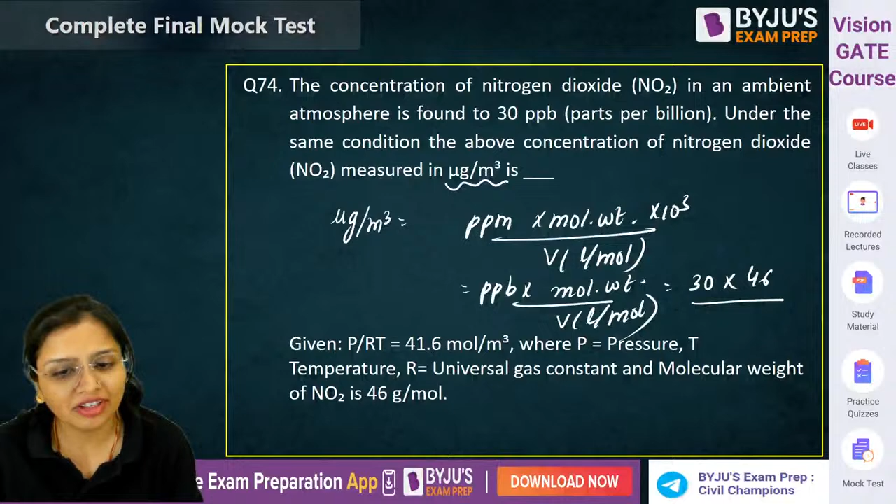Clear? Now, how much it is given? 30. Molecular weight is given to you 46. Volume you need to calculate because volume is not given to you in the question directly. But they have given you P by RT. Now you know that PV is equal to nRT. Now if you want to calculate volume, this will be RT by P. Or you can write it as 1 upon P by RT. So this will become 1 upon 41.6 mole per meter cube. Now you know 1 meter cube is equal to 1000 liters.

ये substitute करो, liters per mole. How much it is coming? Final answer 57.408. Correct. Absolutely correct. Abhay, good. This is the final answer. Correct. Chalo. Now this question, because वो मुझे P1, V1, T1 भी बताना है.

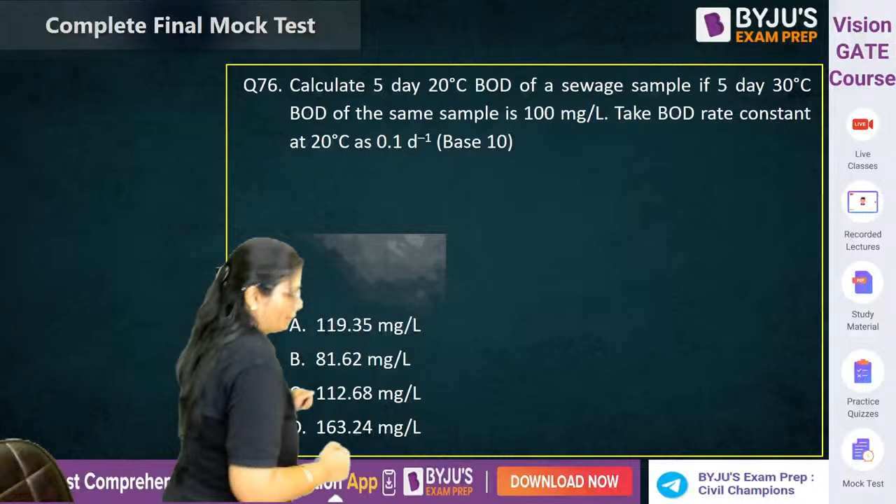लो ऑप्शन दे दिया, सॉल्व करो. I'll just be back. Got the answer?

Calculate 5-day BOD at 20 degrees Celsius, if 5-day BOD at 30 degrees Celsius is given to you as 100 mg per liter. First, you have to calculate BOD ultimate. BOD ultimate into 1 minus 10 raised to power minus KD 30 into T. Now, BOD ultimate will be 100 over 1 minus 10 raised to power. Now, first you need to calculate what? K30. कैसे निकालोगे? Deoxygenation rate. आ गया किसी का? Anybody got it? 1.047.

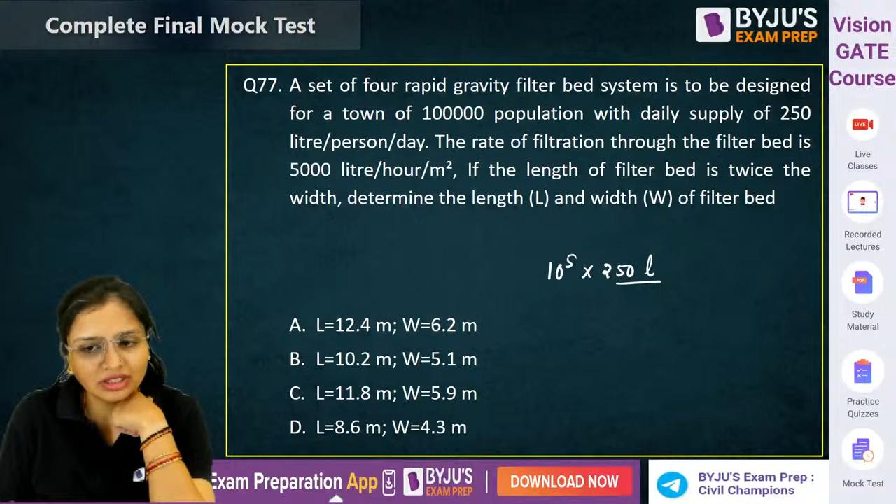Now this question. A set of 4 rapid sand gravity filter beds is to be designed for a population of 1 lakh. Daily supply is 250 liters per capita per day. This much is the water required. And in per hour, how much water is filtered? 5000 liter per hour per meter square. So discharge by velocity will give you area. One line you should be able to do this now.

1 day is equal to how many hours? 24 hours. You will get the area in meter square. First tell me the area in meter square. 208.33. Don't make a mistake now. This is the total area. How many filters are there? 4. So area of one filter unit will be 208.33 divided by 4. 52.08.

Now you know length into width will be the area of one filter unit. And length is given to you twice the width. Solve it. Correct. Width will come out to be 5.1 meter and length will come out to be 10.2 meter. B is the correct answer. Correct, Lucky.

Solve this. I'll give you the options. This is a good question. Solve a little first, then I'll give you the options. Volume it is asking in this question. A town is there, 30,000 population, sewage 120 liters per person is produced. BOD coming is 250. 30% is removed in the primary sedimentation tank.

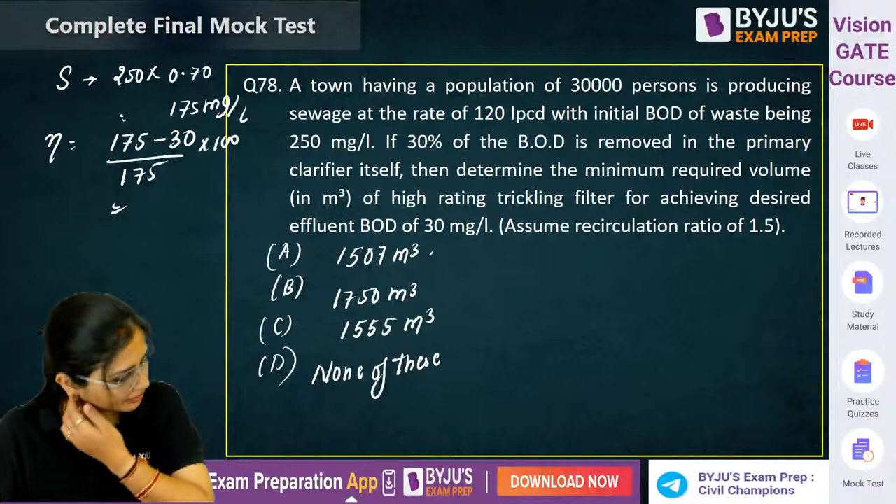So how much BOD is going into the trickling filter? 30% of 250 mg per liter is removed, so 70% is going. 250 into 0.70, that is 175 mg per liter is going. And how much is coming out? 30. So can you calculate the BOD efficiency? Influent minus effluent divided by influent into 100. 82.86%.

Now you know this formula. 100. If you want the volume in meter cubes, just write 0.44. If you want the volume in hectare meter, 0.0044. This will be W by VF, because here recirculation ratio is given. So first you need to calculate recirculation factor F. Final answer 1.89. Efficiency 82.86, 100, 1 plus 0.44. Volume was here.

What is the organic loading rate in kg per day? 30,000 persons, one person 120 liters per day, and BOD 175 mg per liter. Convert mg into kg, 10 raised to power minus 6. So you will get how much BOD is entering the trickling filter in kg per day. 630. Correct, Jagrati. So the volume will come out to be approximately 1507. A answer. Simple.

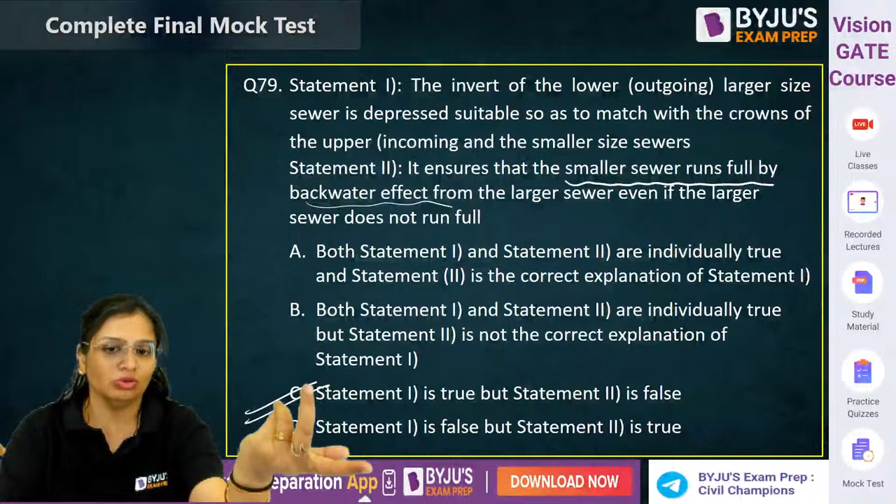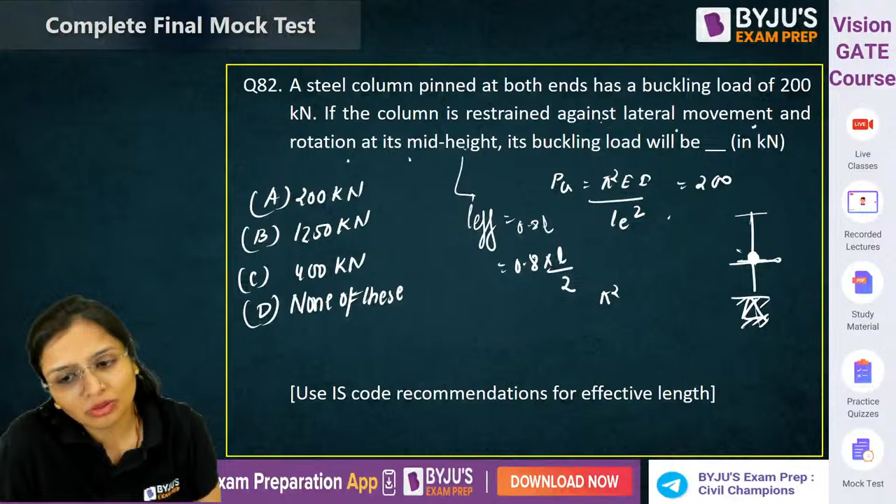The column is restrained against lateral movement and rotation. Effective length कितना होता है guys? ये तो याद रखना पड़ेगा, 0.8 times L. This is the one. Column is restrained against lateral movement and rotation at its mid height. 0.8 times L. Mid height पर हो रहा है, that is L by 2. इसकी value was given 200 kilonewton. Pi square EI upon 0.8 L by 2 whole square.

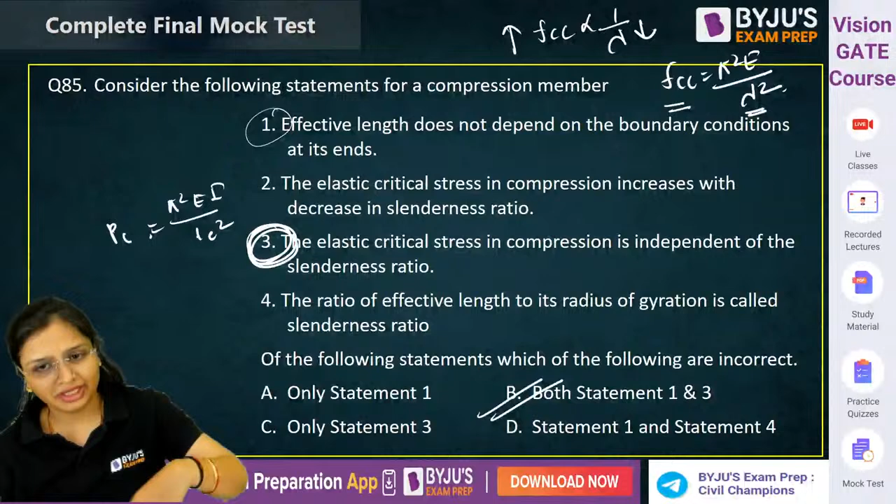क्या लिखा है? The ratio of effective length to its radius of gyration, L by R, is called slenderness ratio. ये सही है। This second statement I haven't explained to you. The elastic critical stress increases with decrease in slenderness ratio. देखो inversely proportional है। So if slenderness ratio will decrease, FCC will increase. So that is correct. In case अगर आपको नहीं पता था तो I've told you that.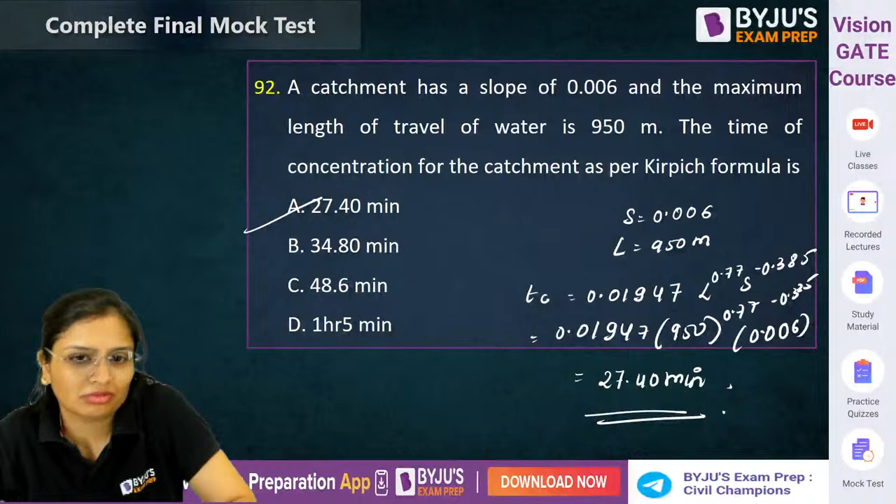0.006 minus 0.385. Come on, how much it will come? So this is the formula of time of concentration using Kirpich's equation. Remember that, thik hai, chalo.

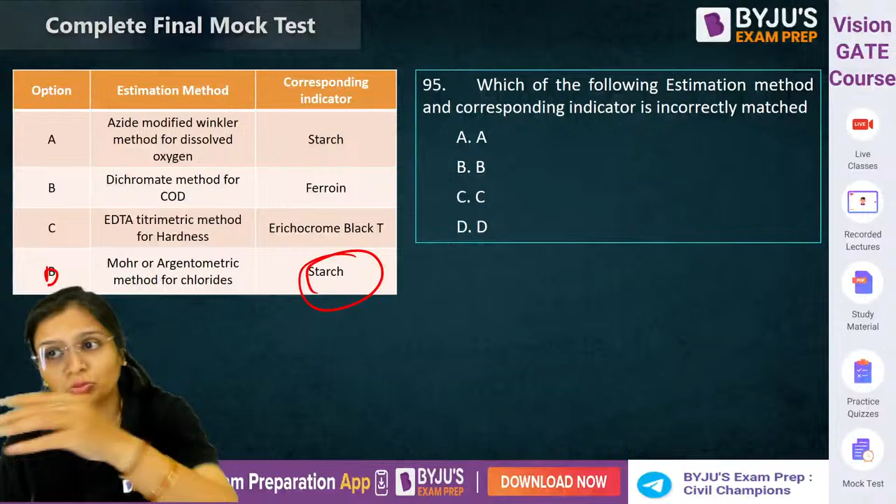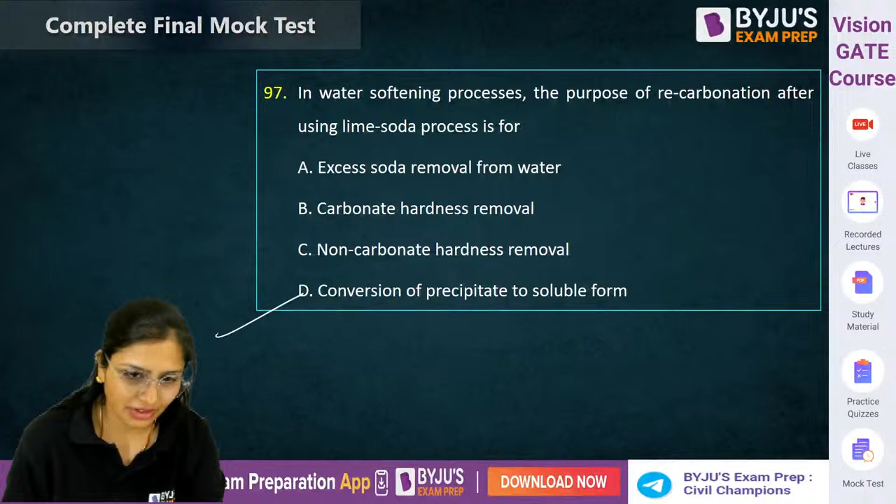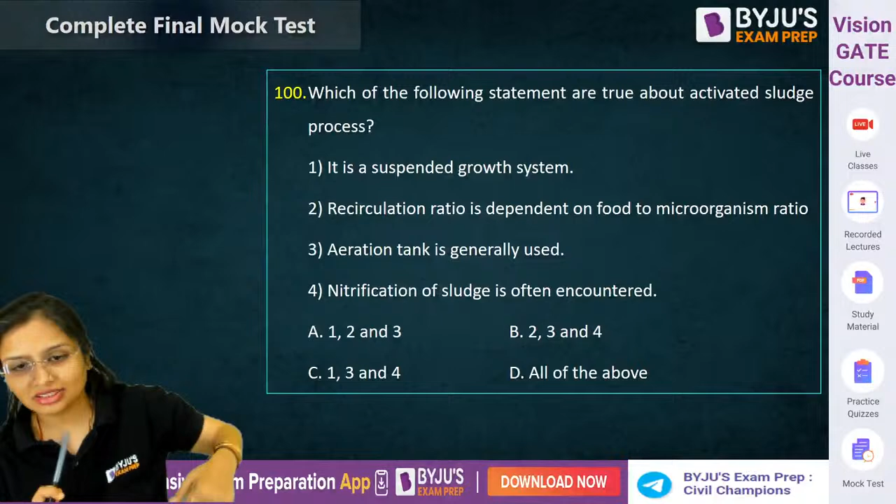लास्ट वन. Which of the following statements are true about activated sludge process? चलो. इसका आंसर मुझे लग रहा है सस्पेंडेड ग्रोथ सिस्टम. करेक्ट. एरिएशन टैंक इज यूज्ड. करेक्ट. नाइट्रिफिकेशन भी हो जाता है. करेक्ट. रिसर्कुलेशन रेशियो इज डिपेंडेंट ऑन फूड टू माइक्रो ऑर्गेनिजम्स रेशियो.

Recirculation ratio, remember ये बहुत famous question asked in many examinations. Recirculation ratio in activated sludge process is controlled by sludge volume index. Volume occupied in ml by 1 gram of suspended solids when allowed to settle for 30 minutes. Correct.